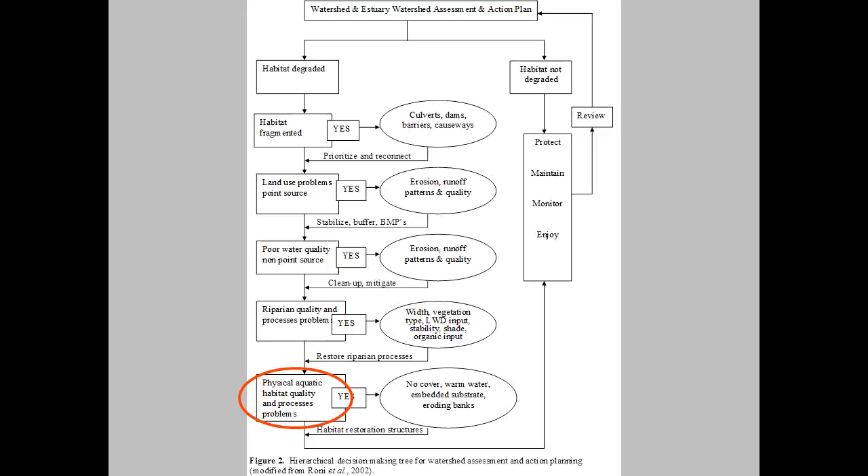So, in a nutshell, we know watercourses come to form a certain way in our watersheds, and in our region, typically, we'll see a watercourse that sort of has like an S shape to it. So you'll have formations of pools in your bends, and then you'll have riffles, which are where the water's broken up and more shallow, and you'll have an alternation of these two main habitats. Of course, there are several other habitat types, but those are the main ones.

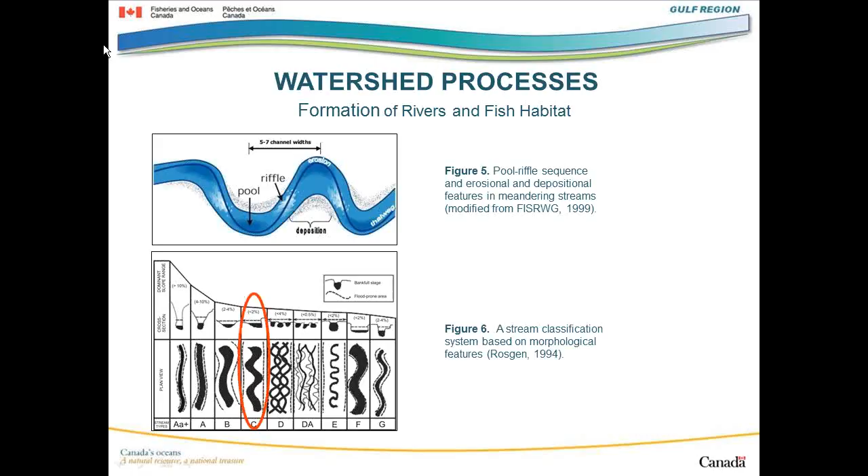Okay. Well, if we put that aside now, we look at really in the stream, because we're interested in habitat here. So if we look at a stream segment, let's say if you were to fly over part of a watershed, and then you were to fly closer, and you look at the segment, then you go into your reach, and then you go really into your pools and riffles. And then, let's say if you're able to go underneath the water, then you look at the various aspects of the fish habitat.

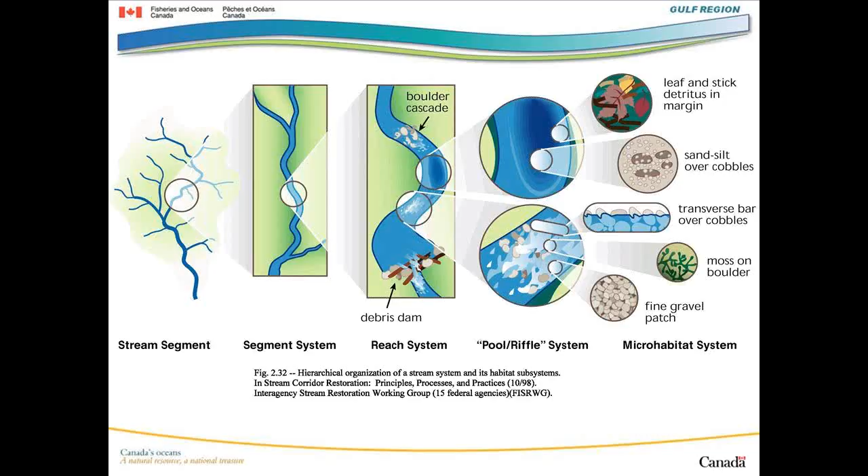You may find gravel, you may find moss that grows on boulders. The gravel may align itself to give you these transverse bars. I mean, you'll have variations of cobble, sand, silt. You may have leaf and other organic material in there. And that's that whole diversity that makes up your fish habitat. And of course, there's other organisms in there.

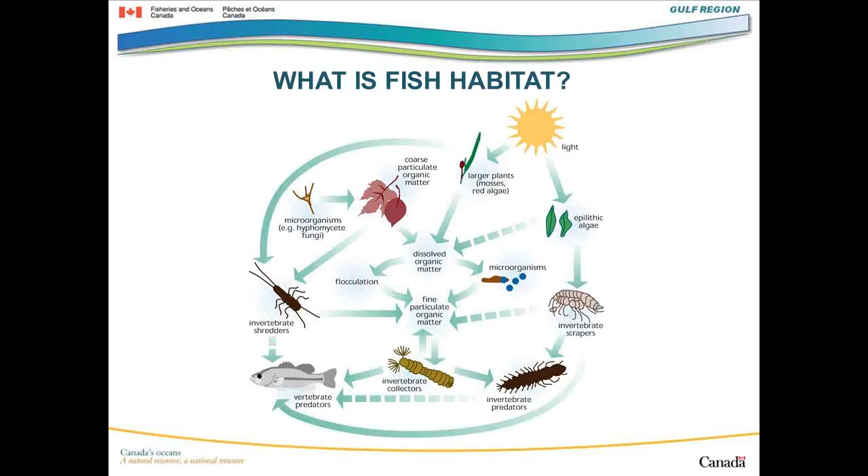If you look at the microorganisms like invertebrates, some of which their job is to break up the organic material. We call them shredders. And of course, as the organic material gets broken down, then you have some others scraping this film off of degrading organic material, which we call scrapers. And you have all the other organisms which come into play in the food web and end up being food for these fish. So it's interesting how the complexity ends up giving these nice fish that we prize so much when we go fishing, which I like to fish as well.

Okay, so let's set that aside. Now, one concept here, which I remember in university caught my interest, was called the river continuum concept. Not only do we have streams and rivers, but as we go at the top of a watershed and we work our way down, we'll notice that some things tend to change gradually. It's all relative, but mind you, the proportions of the types of invertebrates you'll find at the bottom of the river will tend to change as you go down.

As the canopy will open up, so when you're in the smaller streams, you'll notice that the trees tend to crowd over and there'll be less light coming in. But to kickstart the primary productivity, you'll have more leaf material and organic matter falling into the streams. So it would make sense that you have more of these shredder-type invertebrates picking up that organic material, right?

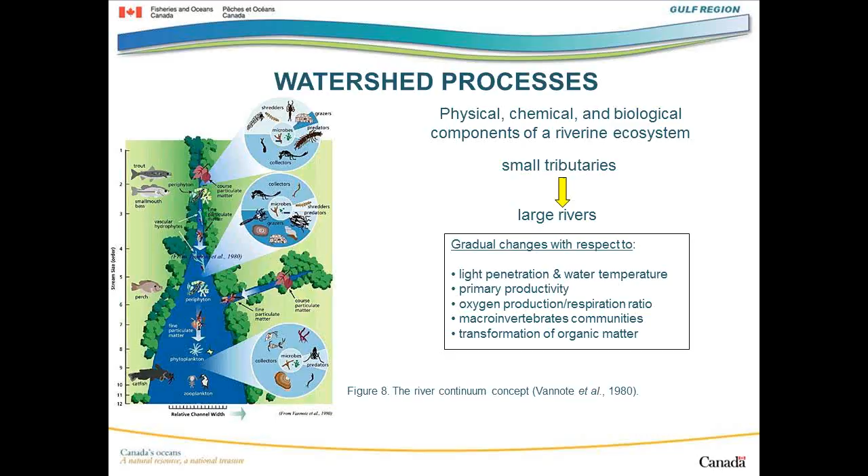And as the canopy opens up, as you move down the watershed, then you get more light input. It would only make sense then, you'd have more algae and that type as you move down. So all that to say, this was a concept that was presented and generally well accepted. Now, those are all nice when you have an ecosystem in balance and everything seems to be working right, that's okay.

But you don't have to walk very far in many of our watersheds before running into problems. And that's why the focus here was to talk about Chapter 4 in our publication, which is basically the in-stream techniques. And these fall into broad categories, one being in-stream cover, bank stabilization, the formation of pool-riffles and channel narrowing, especially where you have streams that are over-widened. And last of all, the removal of obstructions and debris.

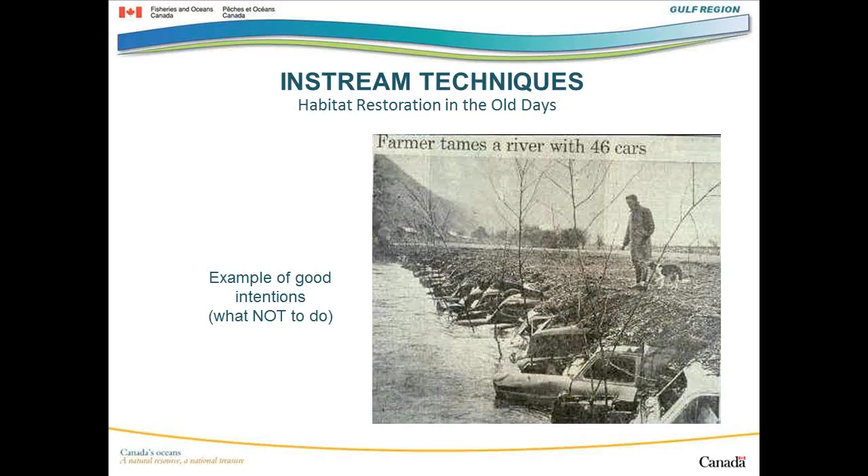And some had good intentions to stabilize banks, but here would be an example of what not to do. I don't think you should go out to the junkyard and grab a bunch of cars and use them for riverbank stabilization, but nonetheless you can see that they were already thinking of doing some good back then.

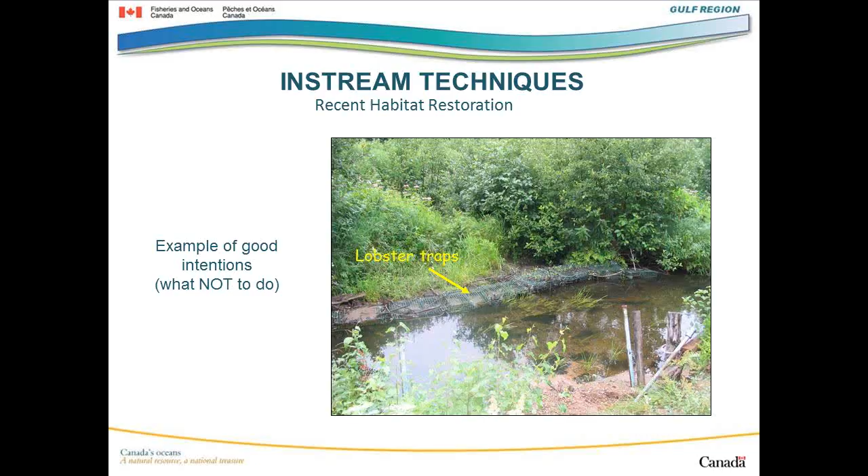Now let's look at some valid approaches that work, starting off with the first category, in-stream cover. The techniques you'll see here are all in this publication. If you're interested afterwards, I can always send you a PDF. We don't have any more printed copies, but we do have the PDF file, which can be freely shared among groups or interested people. So these are all in the book, no need to worry. So let's start off with the first one here, half logs or log covers.

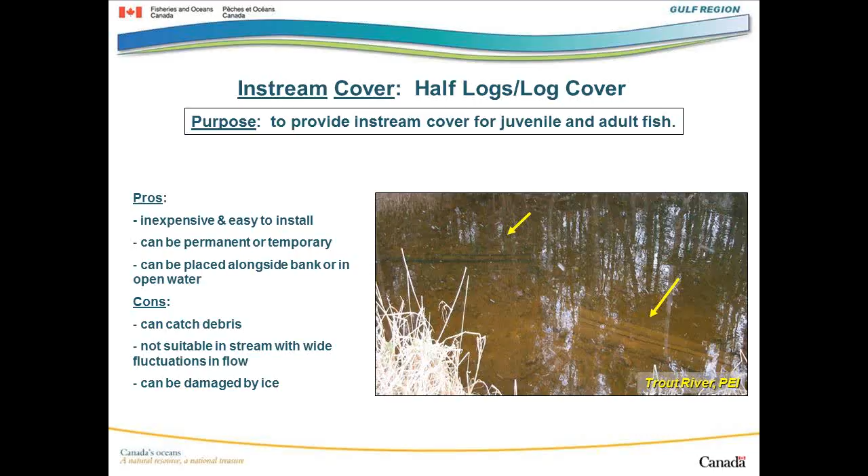They can be fairly easy to install, and can either remain there or be temporary. You have to watch out where they're placed, because they can catch debris if they're not placed well, and they could also be damaged by ice if they're set too high. This is just a schematic drawing that's in our manual that shows how they would typically be installed.

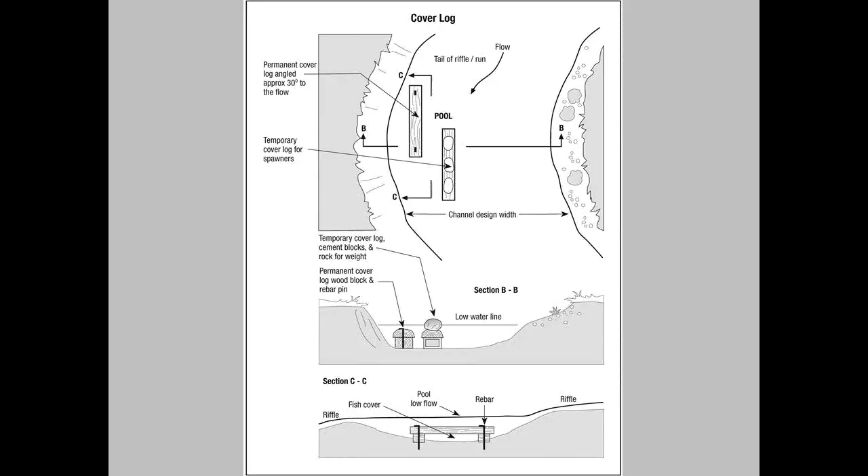Okay, now if we go to artificial undercut banks. Now for most people who go fishing, they may know what is an undercut bank, often where the trout will hang out. But anyways, in a stream where you have no undercuts, in this case you'll see the picture, this was a newly constructed channel. It was pretty much homogeneous, no fish habitat, no cover, as you can see.

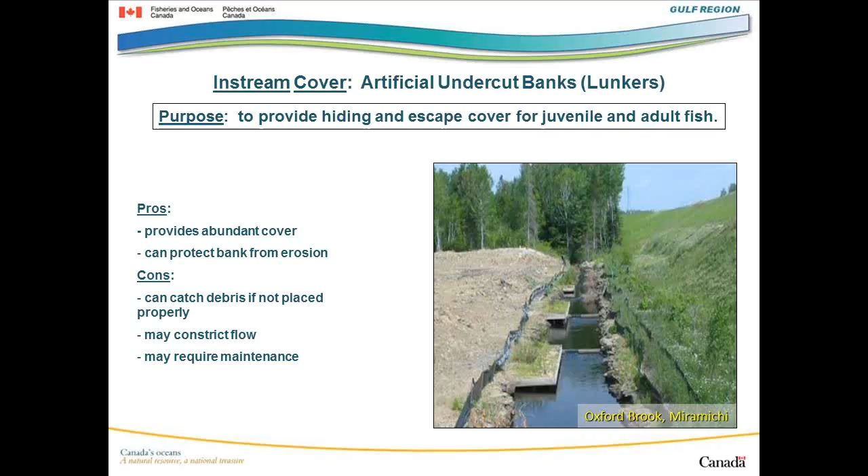So in this case the artificial undercuts, or we call them lunkers, were used to create some cover. And these provide perfect cover for juvenile and adult fish. They provide lots of cover, and they also can serve to protect the stream bank, but however, they can catch debris and ice, and they may constrict flow and may require some maintenance every few years. Of course, here is the drawing of how they're done.

All right, another one that's used in larger rivers mostly is rock or boulder groupings. And they're used to provide cover as well, and to break up where currents are pretty much all homogeneous and the same. So by creating these little eddies, you create these little micro habitats, and also some resting areas can be created behind the rocks. So yeah, and they do look natural, of course.

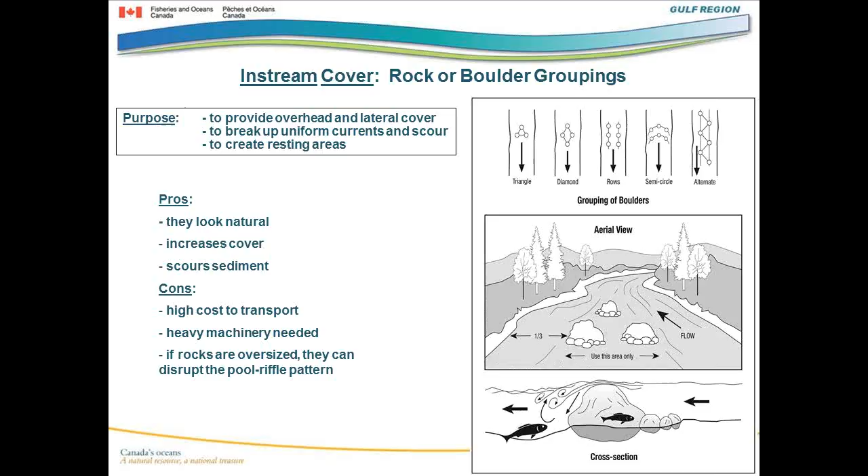They increase cover, but they do require heavy machinery in a lot of cases, and it can be a little more costly. And of course, if you add too many of them or they're too large, they can start to disrupt the Pool-Riffle pattern. So they have to be well thought out.

Another technique for creating cover, root wads. Essentially, this is an uprooted tree, so you have these large trees transported to your site with the large stem intact. And what you do, you create trenches into the bank, and you insert the trees, but you let the roots stick out into the river.

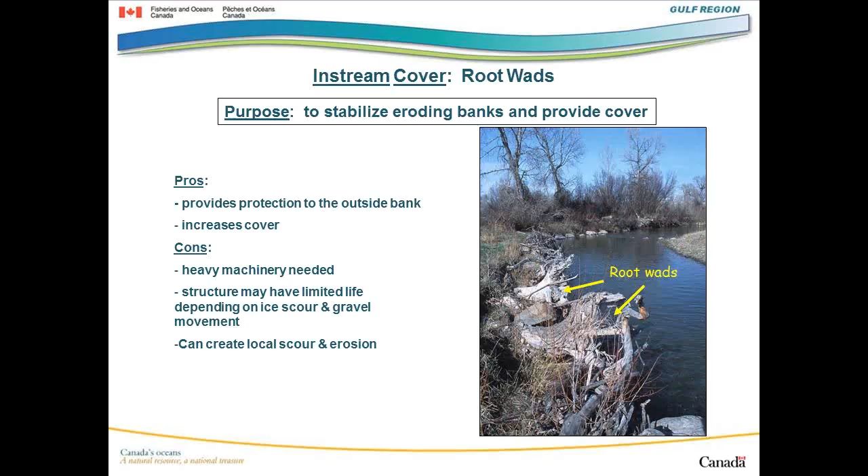And what this does, of course, it slows down the current near the stream bank, and creates bank protection, and at the same time it creates some cover in these little microhabitats where fish can hide. These would be very popular spots for trout, especially. But if there's a drawback, it's that you also need heavy machinery to install some of these, and they need to be installed correctly. And here's another drawing as to how they could be installed.

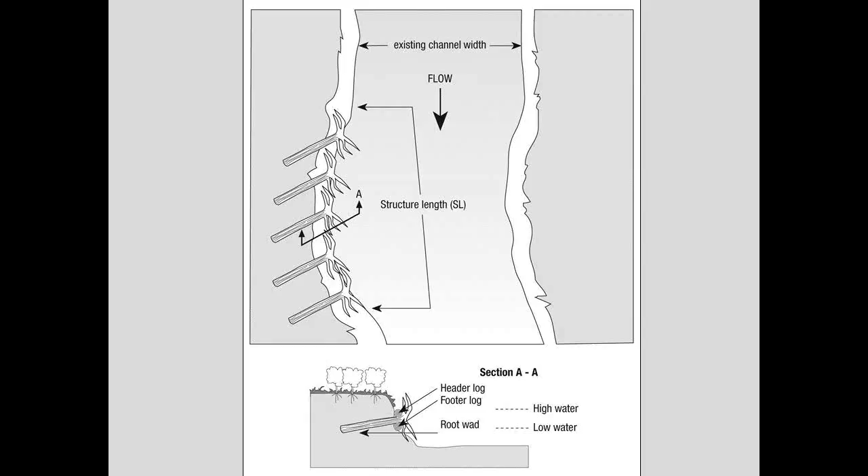Bank stabilization. The root wads were also an example of bank stabilization. But here, if we go into the classical examples, I'm sure you've all seen riprap used along water courses. Of course, riprap really does work well, and it's flexible as a barrier, and it can provide fish cover.

And now here's an interesting story. I remember a few years ago starting at DFO, me being the young biologist, I would often get into arguments with our engineer, Denny Hushe, at the time, and he said, well, I can tell you that riprap provides good fish habitat. And I would tell him, no, if there's no shrubs or anything else, it doesn't work. So yes, if we use large angular rocks and we don't use geotextile underneath, well, there's all these little crevices where the fish can hide, and I'm telling you this fish habitat can be created.

And he was right. So yeah, they can serve a purpose, and they're often used where there's a high risk for erosion, because it's not in all cases where you could use shrubs or vegetation. When there is a high risk of erosion or infrastructure, or in this case, you have a house right next to the river, it may be wise to use riprap. But once again, it takes machinery to line the stream bank with riprap.

And another thing to consider as well is that it will not allow your stream to move laterally, and that's something that was learned years back, in cities especially, where these hard engineered water courses were basically put into a hardened channel. What would happen often, the channel would erode going downwards, and then a lot of these gabions or rocks would fall in. So when you harden your channel, it can come with consequences if it's not done properly.

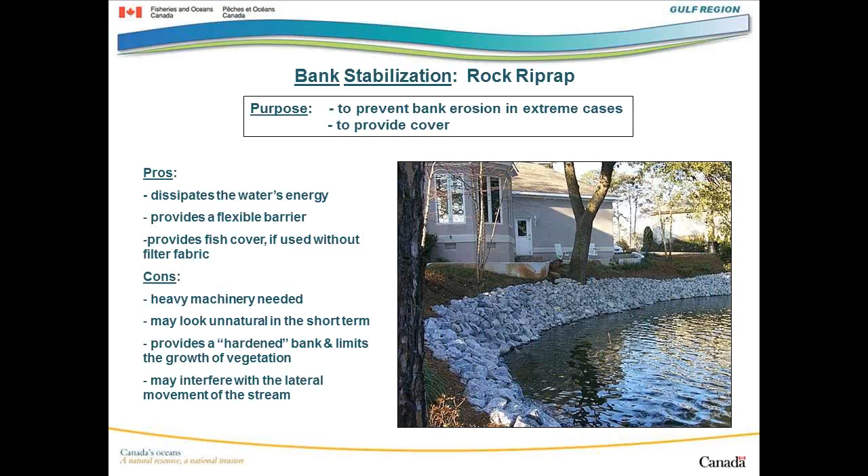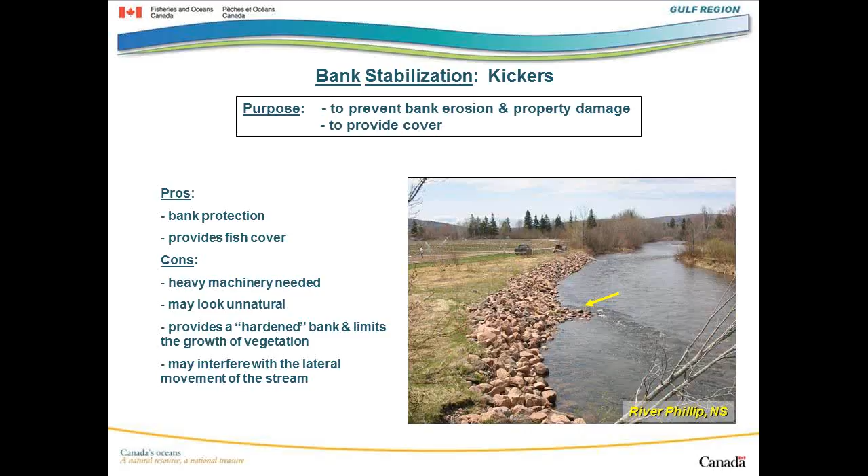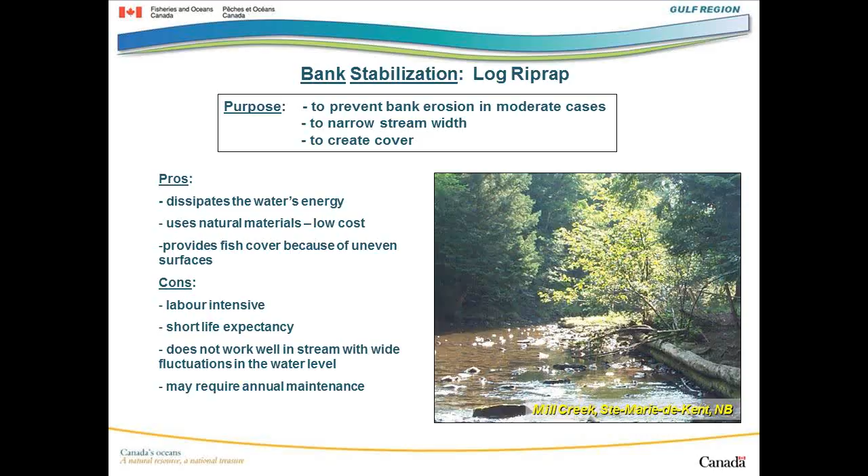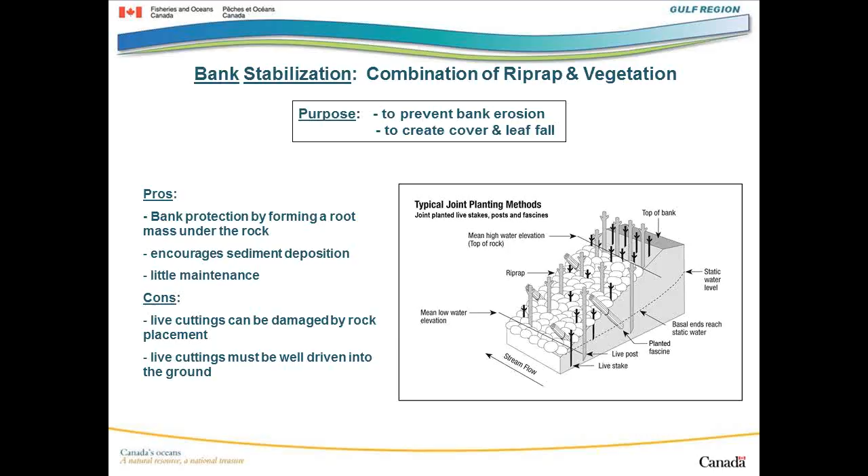But to have the best of both worlds, what you could do is install riprap without geotextile underneath, so you're just laying the riprap on your bank, and allowing some space to plant shrubs or whatnot. It could be willows, it could be other things. So the combination of riprap and vegetation will work together and make for a nice stream bank, and yet at the same time be resistant to erosion.

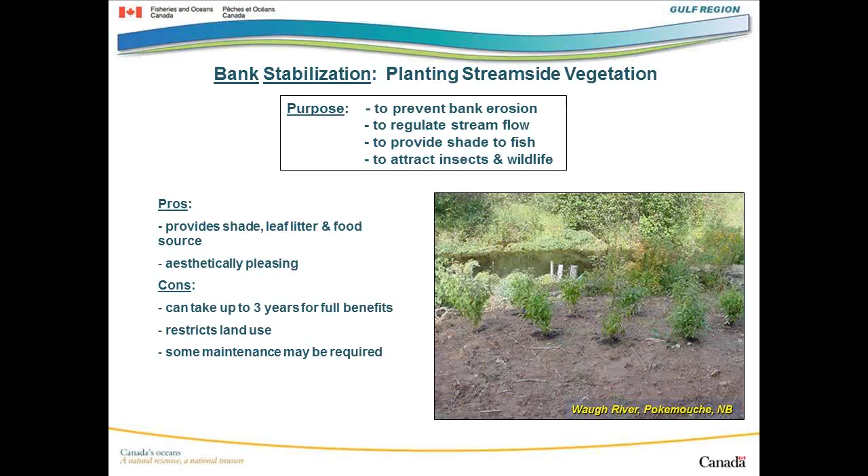But as it mentions here, they can take up to 3 years. Yes, they could take just a few years before they start growing and really take up. So you may have to follow up, and you may have to replant a few, or if it's in the summer and it's very dry, you may have to water some of them. But once they take hold, they work fairly well. And of course, they're very good for bank protection, attracting insects and wildlife, whatnot.

And the thing is, with these, they're very inexpensive. I mean, it's easy to go take a walk in the woods and find small spruce trees. It's fairly easy to do. It's just a little bit of labor work, but it's very easy to put in and low cost. Here's another drawing just to show the concept, how they're installed.

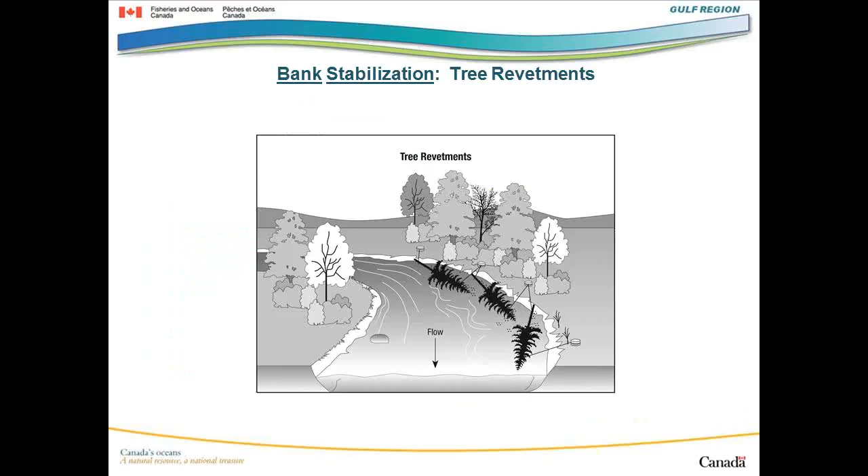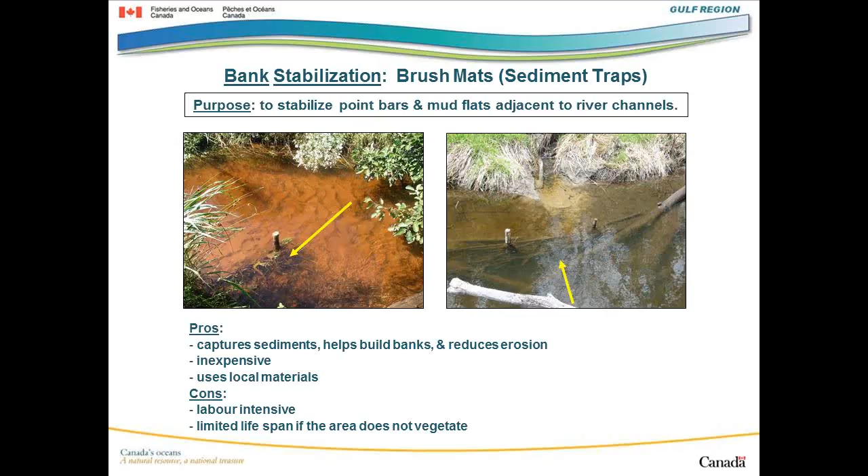Another one here, techniques that are probably used more in PEI, brush mats. They're essentially little brush bundles that are inserted in certain strategic areas, mostly inside the stream beds, to capture silt and to add stability. Of course, they deal with extreme sediment loads in PEI, so they'd be used quite frequently. And it's another technique where they're fairly inexpensive and use local material. But they're labor intensive, and they do have a limited lifespan. Here's another drawing to show you where they would typically be installed.

To go further, we also have brush bundles. In literature, you'll find that sometimes you'll look up a technique, and it's actually two techniques. Now, what they call brush bundles in PEI, what I found in the literature, especially in the U.S. and throughout Canada, is that we would often call them fascines, and fascines and brush bundles, as we call them in PEI, are not necessarily the same.

Now, the brush bundles that I tend to use, or the ones we call fascines, are essentially a bundle. You take a bundle of straight alder cuttings, and you'll bunch them up into maybe a foot-wide bundle, and you'll dig a trench along the stream bank. And what you do is you insert them halfway in the stream bank, and if the cuttings are fresh, some of these branches, the shoots will start to grow.

So it does two things. It captures silt that runs off from your stream bank, and it also starts growing, and so you have some new vegetation growing, and it's also a silt trap. These may require some maintenance as well, and may take time before they're fully stable.

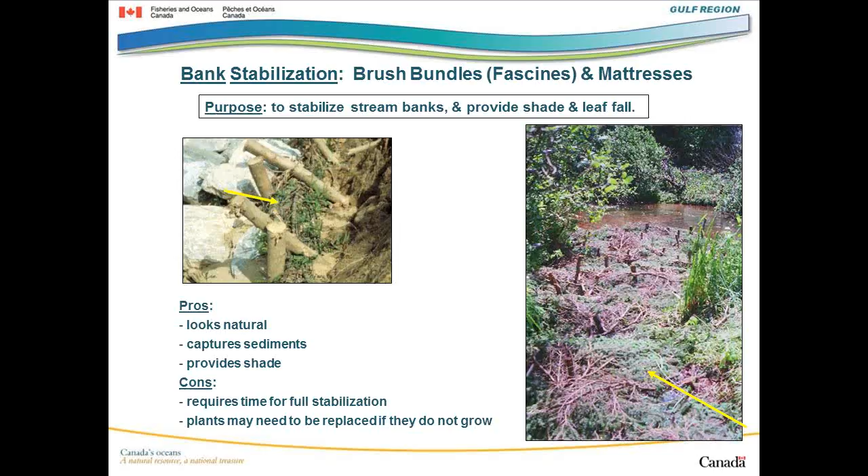If you look at the picture on the right here, this is what you would call a brush mattress. Essentially, you could take branches, from spruce or fir, and you take the bottom branches, which are usually flat, and you lay them out on eroded soil, and you stake them down, and this will form a barrier against runoff or strong rains, which would encourage erosion. So this is a way of creating a barrier for erosion. And these are just drawings to show more of the technical aspects of how they're installed.

I hope you guys are catching this, or at least getting the essential. Don't worry about the fine details. You can always get a copy of this publication later on.

Okay, next off, this would be a log fence post. These are similar to the log riprap, which you saw a while ago, except this would be probably a little harder to build. If you have a river that's severely overwidened, or let's say you just have a section that's overwide in that small section, you could sort of cut it off, as you'll see here in the drawing. I'm trying to explain it here as best as I can.

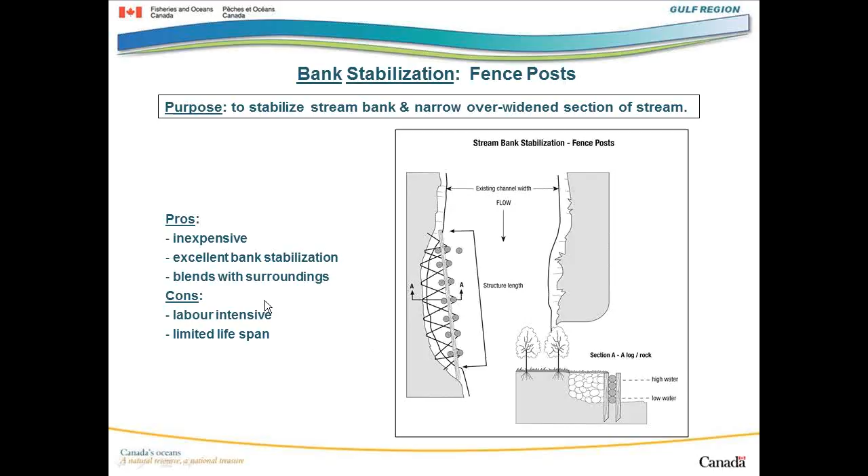But you have a section here that's overwide, and what they did is they just chose to close it off here, and you'd have to make sure that's reinforced in there, and you add a lot of debris or rock, as you can see here, behind this wall of fence post. And this is a way of sort of filling in that eroded section, if you wish. But it is labor intensive, and of course, if you use a lot of logs, they will require maintenance. If not, they will break up with time. But they do provide excellent bank stabilization if they're constructed right.

Well, let's go into the interesting part here. I think a lot of groups probably installed some of these structures before. I'd say the most famous one is probably the digger logs. I know back in the 90s, when I first started with environmental groups, I often heard about digger logs, and they were installed by quite a few groups back then. I think DFO did a great job in selling these.

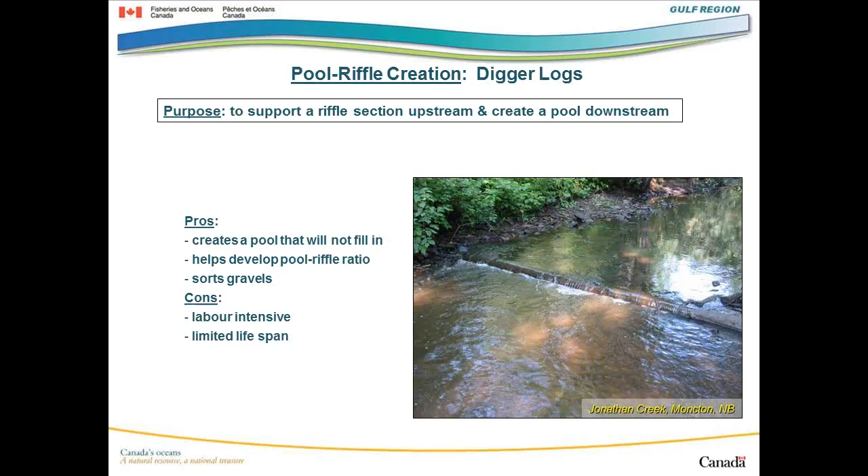So anyways, if we look at the purpose, if you're in a channel where there seems to be a lack of pools or a lack of meandering, these are the perfect structures. They'll help you recreate the meandering within your stream, and also create pools where there's a lack of pools. So as the name would imply, they are digger logs. So they do dig. When they're installed in the right substrate, they'll dig a pool underneath. So you see the water cascading over the log, as you see here.

You can see that the water is coming towards you here this way. So it does cascade over, and when it cascades over, it scours. So all along the log here, you'll get some scouring. So you'll have this pool formed just below the log, just downstream of the log. And from experience, I can tell you a lot of the nice larger trout tend to hang close to the log where it's deeper.

Okay, so it's a picture, and this is one of the projects that I worked on, and some of my former colleagues here. So as you can see, they're put in sequence. There's one further up here, and there'll be some further up there, and they went up, I think, for a good kilometer or so. But these, of course, are labor intensive, and they need to be installed right. If they're not installed right, they can become barriers or partial barriers to migration. So they have to be installed the right way.

Another one, I'd say this is probably my favorite technique, or the one that I've most promoted with groups, because they're very easy to install. They're called deflectors, but I'm talking more specifically about tree deflectors, because they're easy to install, and they do work very well. And even if they're not installed exactly like they're supposed to, they probably won't do any harm. So that's why I tend to prefer them.

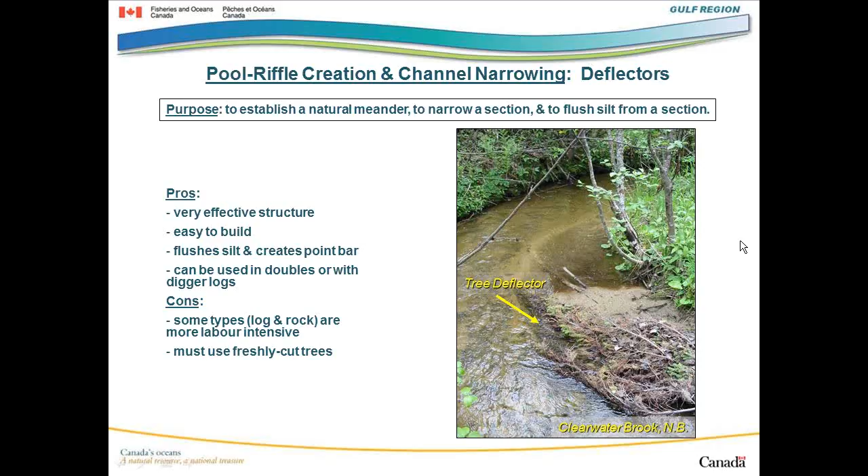Other types of deflectors you'll see in larger rivers, because in larger rivers it's not so easy to install some of these trees. So the best way is to use crib deflectors. Essentially you create a triangle out of logs and you fill them up with rocks. These are typically used in larger rivers, but they work on the same principle.

What if you ask me, well, Terry, I have this large river, it could be, I don't know, 20 meters across, and I think we need pools and we need to put in a digger log. Well, you're not going to find a tree that long or able to withstand the flow, and even trying to put it in is going to be problematic. You'll never find a tree large enough unless you found a Sitka spruce that's willing to be shipped from BC. So in this case, it's not logical to use trees in larger river systems.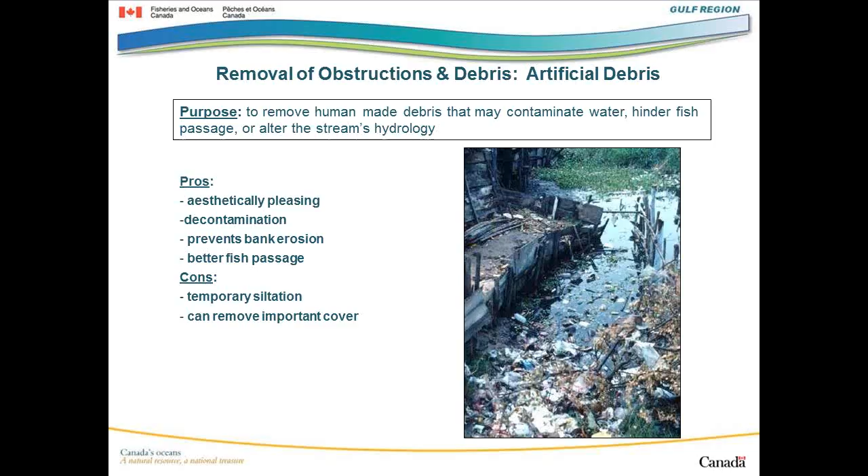But I did find an approach, and the approach that seemed to work over the years was that I would advise the group, let's do what we call selective debris removal. Now, woody debris does play a role in a small stream's ecology, so you cannot remove everything. And even if it would be helpful to remove all the debris at once, then you'd have this problem of large amounts of sediments making their way through the system. We don't want that. So when I say selective debris removal, typically, depending on the situation, they would remove especially the debris that would interfere with flow or the hydrology, or which would divert water into a bank and cause other erosional problems.

So by carefully removing the proper amount of debris and the right ones, it would allow the water to once again flow into somewhat of a channel. And once the silts start to scour over time, typically groups would go through a selective clearing of some of these debris. And over several months, a channel will form. And then with the remaining silt that has accumulated, they would install some of these tree deflectors to finally flush out the rest of the silt and deposit it on the banks.

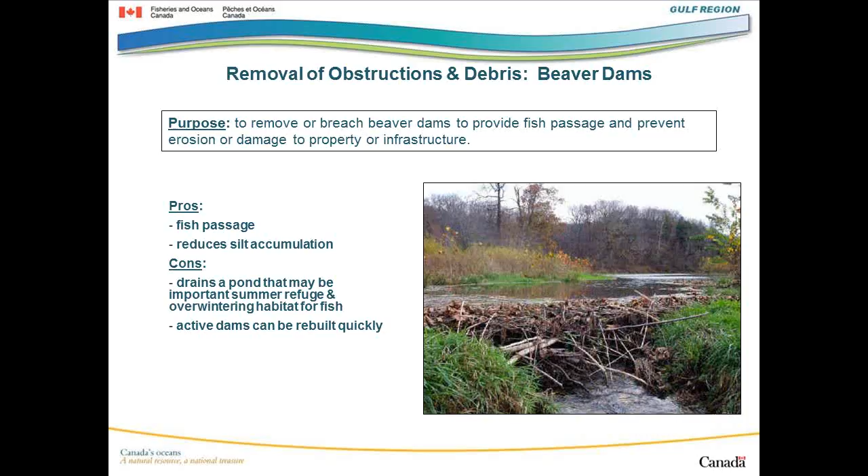Now, in this case, if you do determine that that's the approach, you will have to get the proper permits. I know in New Brunswick the Department of Natural Resources does have guidelines for that, and they do need to give their input. So yeah, it's all relative. It can be a yes or it can be a no when it comes to removing them or dealing with them.

So, oh yes, wow, I guess it's the end. I was told to try to do it in a half hour. I'm a little over, and I'm sorry for that. But it's a lot of material to cover, and I really only gave you a quick summary of these techniques. Really, there is much more to them. But anyways, that's why we have our publication, and there are much more details in the publication if you wish to have a copy.